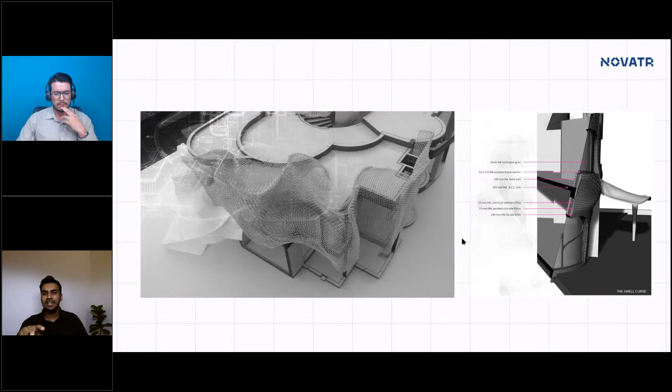But once I did the course, I realized it's not just limited to creating these forms, but you can actually use the information these tools generate to take advantage and automate your construction drawing processes and all the other things that come after the design process. So I think in that case it helped a lot.

As you can see in some of the pictures of this project, it was almost 256 brick courses, and we had these different curves happening everywhere. So it was very difficult for us to also create different brick bonds. In some places we had the jali patterns, which is like a rotation of bricks at certain angles. Somewhere we had the normal English bond, somewhere a different kind of bond.

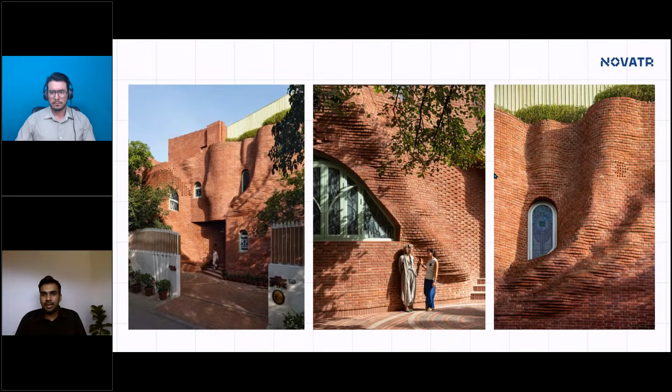Being able to incorporate all this into that organic facade was again a big task. That's when I again relied on computational design to automate this whole process - first generating the brick walls in Grasshopper, and then also using additional tools to automate the entire construction drawings.

For this, I remember we had created some 256 floor plans, which were all unique. For every brick turning at a different angle, we were able to color code it in a different way, which made our construction process super easy because we were not relying on very technically strong builders. So we had to improve our game in the construction drawings itself.

In that way, we were able to adapt to any small tweaks that we had to make because of MEP cuttings and things like that. The entire pipeline was just automated, so anytime we made a change, we had a new set of drawings available to us.

And was it difficult to understand what was the mindset you needed to have in order to come up with all these solutions and different options? Was it difficult from the standpoint of the traditional architect? Did you need to understand more about data, about how all these shapes change? What was the process behind this? What went on in there?

I remember when we were done with the entire surface morphing, I started placing the bricks, and it was so tedious - it took me almost 3 days. After 3 days, we had a design review where we changed the wall, and then I realized this is not feasible. There must be some way in which we can automate this. So I started looking into these different tool sets that are available.

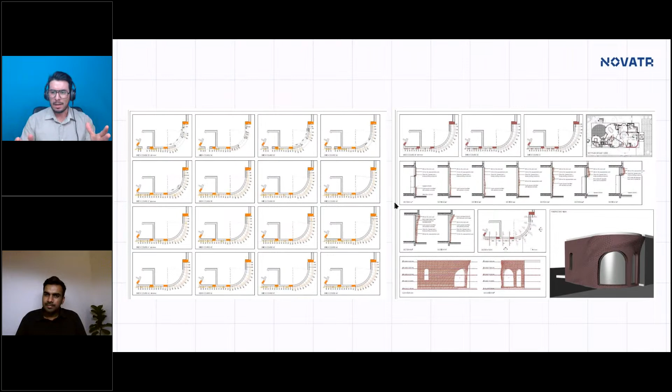Excellent. Now, you mentioned taking a course, a training in the early steps of this project. But after that, you decided to pursue a career in computational design. What was the first step you took after this training and this experience with the project, to actually chase specialization in this field?

Yeah, I think this project was the main pivoting point in my career, because after I did this automation, I never wanted to go back to creating architectural design the same conventional way. So I started exploring different courses where I could improve these kinds of skill sets. At that time, I wanted to just give away with architecture and become a specialist in creating these sort of tools.

That's when I came across this master's at TU Delft, which was giving a specialization in building technology. That course basically helped us learn about all the different specializations within this building technology term—computational design, structural, facade, building physics, all the disciplines were there. And depending on your liking or your inclination, you could choose the specialization and focus on that.

While I was doing my master's, I was lucky enough to get a chance to work with different startups, where I learned about adapting these tools into actual architectural design processes. I was working with a startup called OMRT at that time—now it's a big company—where we were automating the entire design process of the early design understanding. So when you have to create the basic shell first and do all your analysis on that to understand how your building is going to turn out.

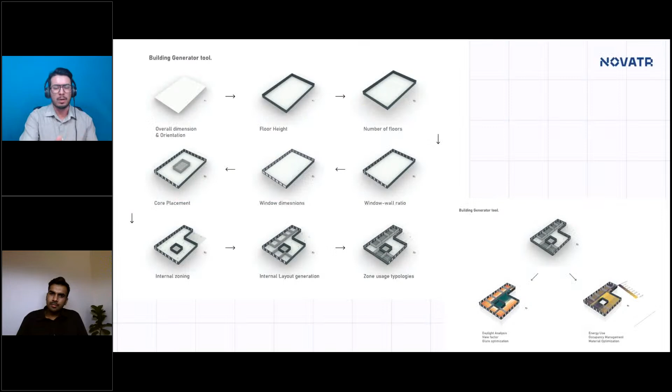Excellent. Now, when it comes to being a generalist versus a specialist, we know that generalist architects know a little bit about a lot of things, and sometimes this knowledge cannot really be allocated to a specific skill that makes a difference between one professional and another. With specialists, that's not the case, because we can determine that a person is unique from others since they know more about a certain field or skill. So when it comes to the actual work of a generalist or traditional architect versus a specialized professional, do you think there are differences in the day-to-day work of a computational designer versus a traditionalist architect?

Yeah, absolutely, there's a big difference. As an architect, you need to be aware of all the things that go inside your building design and your whole design process. Whereas a specialist can just focus on one specific field and assess your design on those aspects. Although the base knowledge that architects have remains similar to what a specialist would have, and the responsibilities at some level would overlap between an architect and a specialist, the approach that both would take is very different.

Starting with the tool sets—the computational designer would use different software. They depend more on computational design tools, using more scripting and programming languages, versus the traditional way of creating designs in your CAD and BIM software.

And I also feel like the design process is very different. For architects, there's a very linear approach to design where you start by creating your conceptual sketches, then go into schematics, then jump into your design development, and then go into your construction drawings stages.

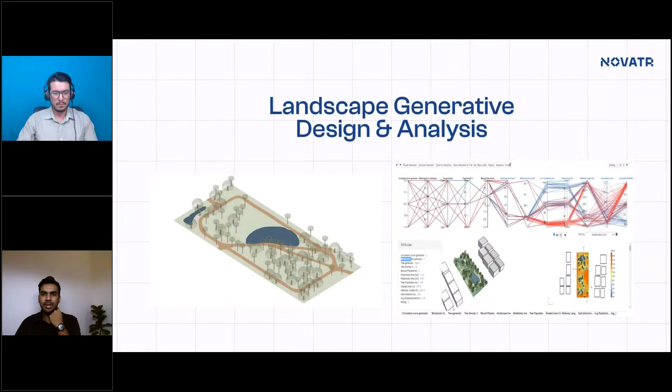The other industry I focus a lot towards is furniture design, where I'm also helping them create their unique designs and automating by creating local software. So maybe we can quickly show a glimpse of this one so people understand what I intend with this automation thing. Let me show the screen - so, there you go.

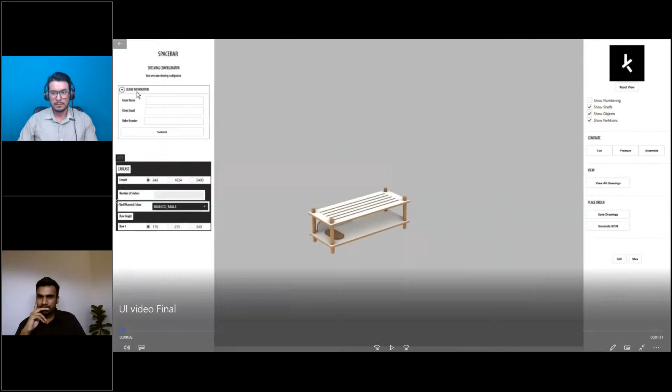Because we do have, in fact, a video for this. So let me... there you go. Are you able to see the video now? Yeah, you have to play it. Excellent.

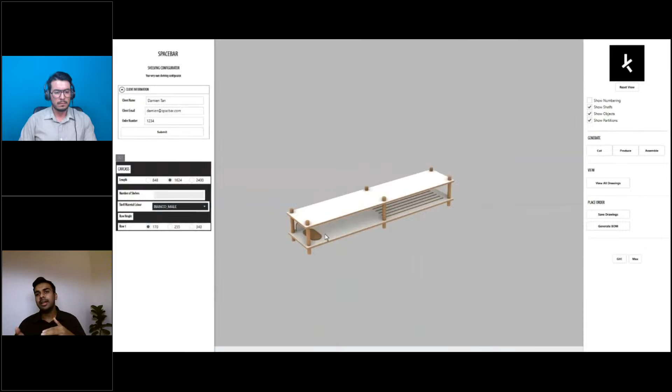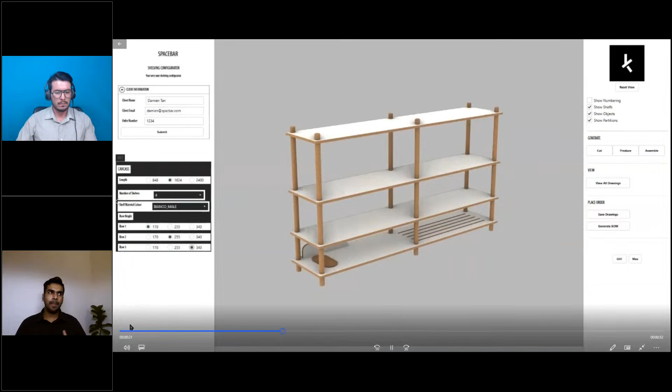So this is a local software that we created for one furniture company, where right from creating a client information base to creating custom designs based on their unique design conditions, they can optimize and change every aspect of the design. All of this is already coded in the background, so whenever they change something, it happens at the same instance.

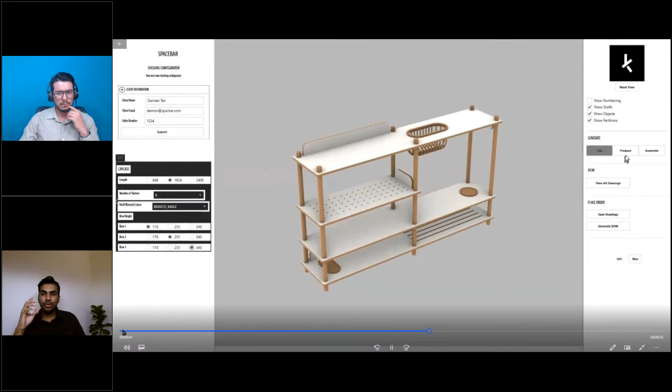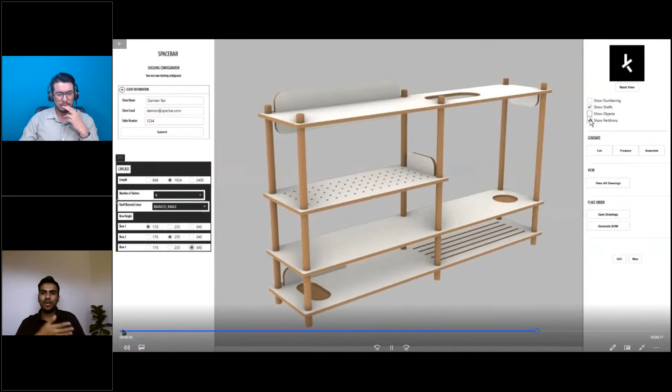And once they have this, they can be confident about the design. They can produce all the CNC cutting drawings, production drawings, any assembly booklets they'll need. They can also cross-check the drawings, create Excel sheets with all the quantifications, calculate the costing, and place the purchase order for the number of boards they would want.

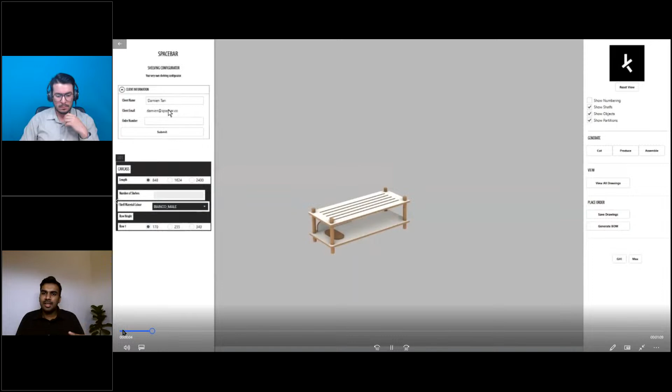Earlier, this whole process of creating a shelf would take easily 4 to 8 weeks from design to production. But now, with the help of this tool, they're able to generate this entire exercise of files within like 5 minutes, and the only step left is actually producing it. You can also generate assembly booklets with it, which give you a step-by-step guide of how to assemble it on your own. So everything gets figured out with this one tool.

Excellent. And I also want to remark something important that you said about the fact that computational design itself just aids the user, right? It doesn't really solve everything for the architect. It's just a tool that we are utilizing. So I think that's something important to remark.

And I think seeing the video that you showed is a huge improvement on the work and workflow that you were mentioning. Just being able to do this model without spending hours and hours modeling it, I think it's a huge development.

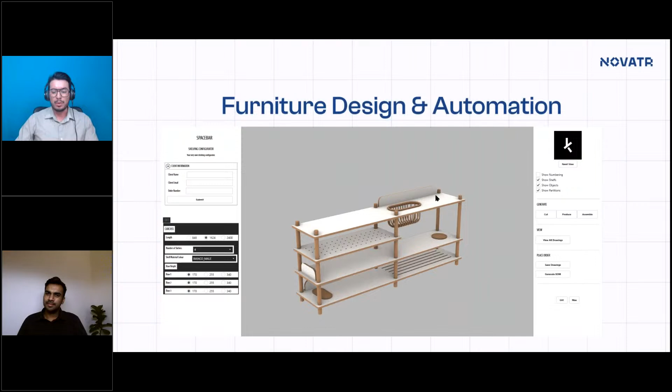So now, when it comes to some of the things you've observed throughout your career, and the clients and experiences you've had, what do you think is the way computational design is developing in the Indian industry specifically? Do you think there's still a lot of missing information or lack of awareness in the industry in India versus, for example, your experience in Europe? What can you tell us about what's happening in the Indian market from your perspective?

Yeah, I think in India, computational design is still in an early adoption stage, but things are changing. We have a lot of specialists coming up, and environmental analyst jobs where you need a basic computational design skill set. A lot of people are also developing their own software where you can use the specialization of computational design. So the demand is definitely increasing, and it's changing very rapidly. I think that's the plus thing.

But I don't see computational design being limited to just one country or region, because it becomes more of a software skill set, right? As an architect, you need to be in that region to construct a building, whereas for computational design, I can be anywhere and assist any other company, because it's just software dealing that we're doing. So I think it also helps us expand our base not only to India, but help solve problems for clients all over the world. I think that's a plus thing.